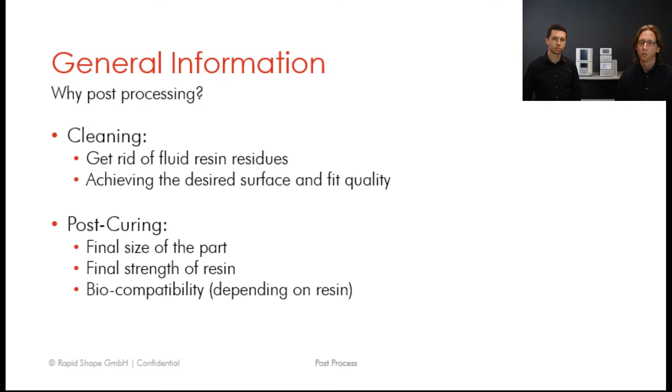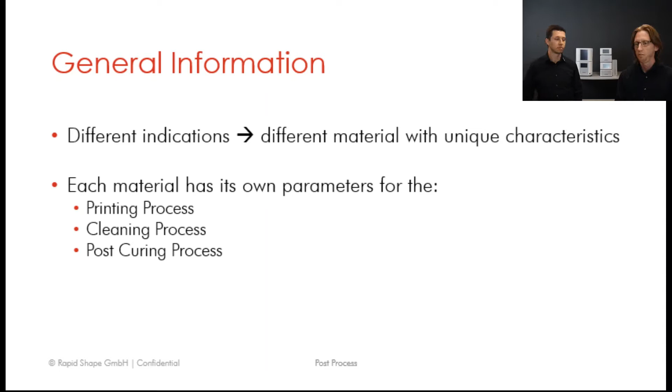All of these parameters are tested and validated by the Rapid Shape lab team together with the Straumann lab team, and the final work is then pushed into a new engine which you will receive in a Netfabb update. I can see there's still no questions, so I think we can move on with the handling.

So, you got two topics, or what shall I do? That's all right, you see, I totally forgot the order of our webinar, sorry for that. No problem, so let me take over the handling of the parts as well, as planned.

A couple of things we have to take care of after finishing the print job. We always have to wear gloves. That is super, super important. Anytime you could get in touch with the resin, you are a little bit in danger, so make sure that you always wear gloves.

Some customers ask us, hey, but do I really need gloves? I'm printing only biocompatible material. So yes, you still need gloves for that, because the biocompatible state is only reached when you finish the full post-process.

So in a liquid state, it is still non-biocompatible, therefore we have to wear gloves all the time. We could get in touch with the resin. Then safety goggles are always important to work with, since on one hand we're working with UV light, and on the other hand with this resin, so if there's any drop getting in touch with your eyes, that could be dangerous.

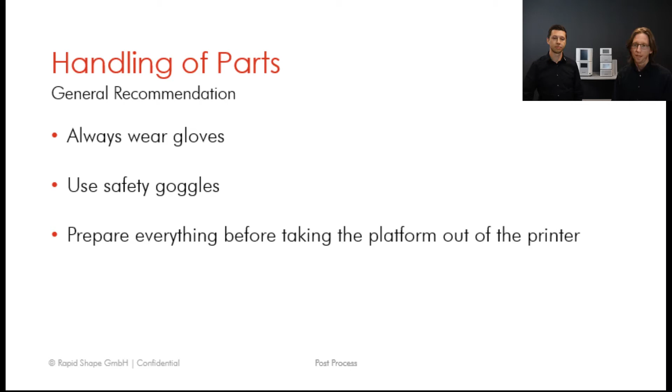Therefore we have the data sheets on every material bottle, but wearing gloves and wearing safety goggles is absolutely necessary here. Then we have to prepare our workspace before we take out the platform of the printer. That would be preparing enough space, putting the cleaning towels on the table, preparing your spatula in order to remove the parts of the platform, and all the other stuff you need.

So what are the steps we have to perform when it comes to removing the top of the build platform? First of all, we just remove the platform carefully out of the printer. We try to avoid any kind of dripping.

Then we want to separate the parts from the platform with a spatula and a hammer. For example, if you print a very rigid model material, it could be pretty difficult to just use a scalpel or spatula to remove that. So give the scalpel or spatula a gentle touch with a hammer, and this way the models will come up really nicely from the platform. It's just a little tool to help in this process.

Then, instead of the regular platform, you also have the surgical guide platform. Remember that there the parts will stay on the platform during the whole post-process, just to make sure the surgical guides don't have any kind of warpage effect, so that you get better results in accuracy and fitting.

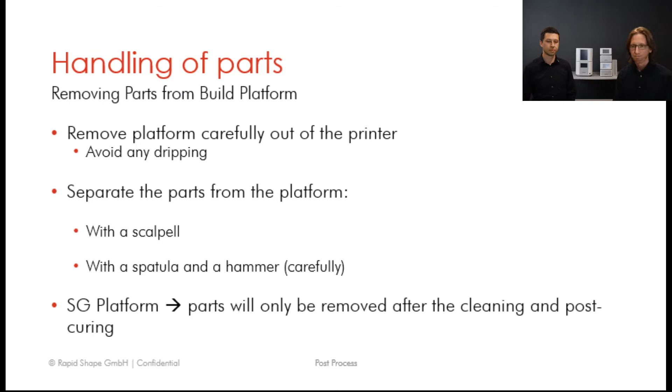Alright, so I think we can move on with the washing and curing units. Maybe as a short note, we also have a video on the Knowledge Center about the post-processing, so you can directly have a look at that video as well.

So in regards to the washing units, there are different methods in the field, which I already mentioned. There's the ultrasonic, there's the flow and swirl - that's just how I call it, I don't know the official term for it - and there's the centrifuge. Ultrasonic is the most used one, and flow and swirl, they both use some kind of cleaning liquid. Then there's the centrifuge, which is without any cleaning liquid, but it's also not used that much. So most common are ultrasonic or the flow and swirl.

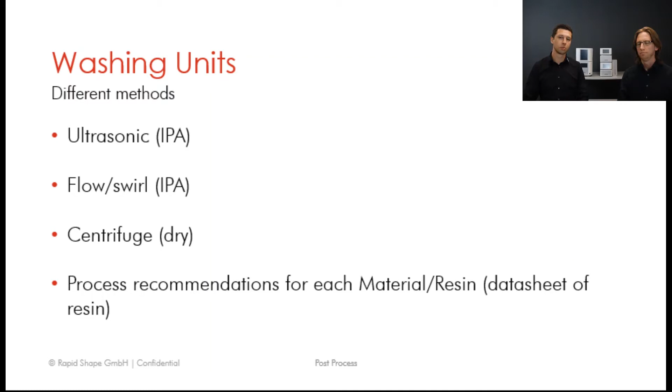As usual, for each process there are recommendations for each material itself. Some are allowed to be centrifuged, some are not, so you can get this information from the material developer or manufacturer.

So let's have a closer look at the ultrasonic. There's a wide variety because it's already used for a lot of things, and the big issue is you get direct contact with the IPA. So use gloves, of course. And the other thing is, with the open top and the ultrasonic, you will get IPA vapor in the air, which is also not that good, especially if there's resin dissolved in the vapor. Additionally, there's also the need to dry the parts after you cleaned them in your ultrasonic bath.

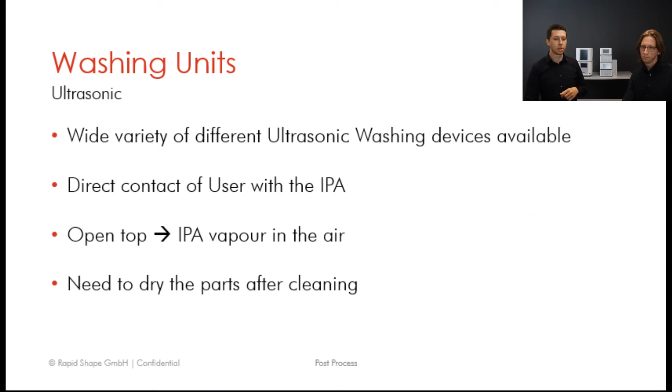If you now compare it to the flow and swirl, I will focus on the RS wash or P wash. The great benefit is, first of all, we got an automatic process. There's no 'I have to select this parameter, I have to switch it to this parameter because I'm using another material now' - it's everything automatic. And we have intelligent connectivity, which makes things even easier. You don't have to select material, you just select the same job you got on the printer, and you'll get it on the cure and the wash.

Additionally, like Robert mentioned, these are all validated parameters already on there, so nothing to worry about on your side. We validated with Straumann and the material manufacturers, put it on the machines, you just select it, execute it, nothing you have to worry about.

Additionally, we got the closed cleaning area, so no IPA vapor is directly going into the air. Additionally, we put it in there while the cleaning area is dry, so no isopropanol inside. Great benefit of using this method.

In order to also get rid of more IPA vapor, we got activated carbon filters inside because we're drying the part after the cleaning. Additionally, we will filter the air used for the drying with activated carbon filters, so even less IPA vapor in the air.

And as I mentioned, of course, no contact with IPA before and after the process. I put it in with gloves, it's in with the resin, close the lid, open it again after the process, and it's dry and clean. So no direct contact with IPA.

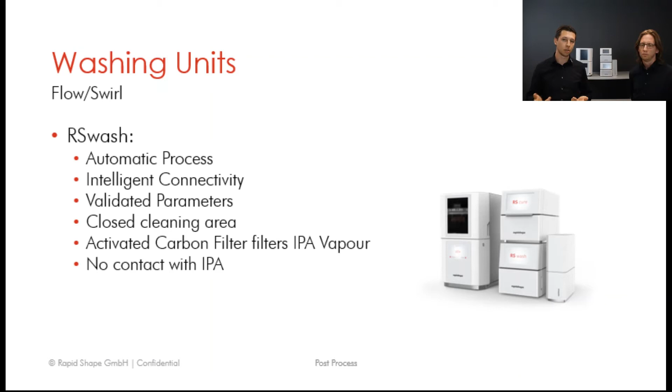Curing units, it's kind of the same. There are some different methods out there: UV bulbs, the flash box, most likely used at the moment, and the LED box, also very well known already in the field. So the only thing which is mainly different is the light source.

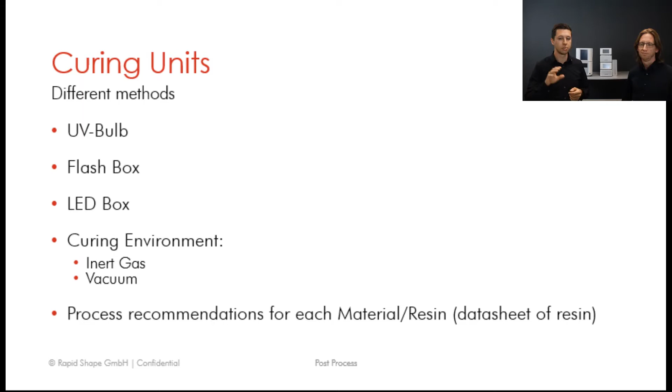And if you're using the curing environment as inert gas or vacuum. Again, also here, process recommendation for each material you can find in the data sheet.

I will just have a closer look here at the LED box, in this case the RS Cure or P-Cure, because this is also for us, or what we think is the easiest solution also for the customer. If you now use the RS Cure, you got the same benefits as the RS Wash.

You got the intelligent connectivity and the automatic process, so no process parameters you have to worry about. And you got a vacuum chamber, so no gas, no additional bottle needed in the office somewhere. So really quite handy solution, really small, totally fine.

I think that's enough information for the curing and washing units, and we will now have a look at the validation process, because we're just talking about all the validation parameters which we've checked and which material manufacturers check. So let's have a look into what's really going on.

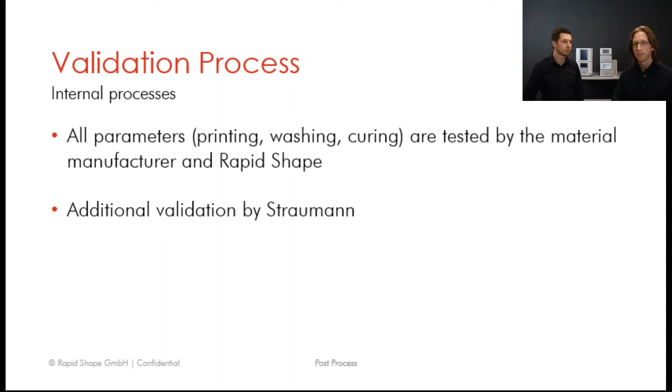How can we ensure that our resin, available in your Netfabb library, is printed in a way that it is precise, accurate, the fitting is nice, it's biocompatible, has a certain strength, and all these characteristics you want with your resin? This is tested by the RapidShape lab team together with the Straumann team. We are also cross-checking this with the material manufacturer, to make sure the customer has a plug-and-play solution. He's buying the resin from manufacturer A, adding this into the validated process, and then he's sure he's getting a perfect print result.

So how is this incorporated into our workflow? There are a couple of things we add to this. On one hand, we have the RFID tag on the bottle, so we can save the information stored on that bottle to the reservoir you use for this job.

We actually have two types of information on this RFID tag. The first is which material it is, so just which material class, saved on the reservoir, as well as the expiration date of this bottle. This is important in case you store these materials for some time, but basically if you use them within a year or 1.5 years, you don't get problems. Just in case, the machine is also checking the expiration date for you.

In addition to that, as mentioned in previous webinars, we have the material parameter selection in Netfabb. This is the most crucial element of the validated workflow. Based on this material parameter selection, we can make sure that not only the printing but also the washing and curing is done in a proper way to ensure accuracy and biocompatibility. We will talk about this in one of the next webinars where we cover wash and cure, but basically this is what it's all about: the RFID tag with the information stored on the reservoir, the parameter in Netfabb we have chosen, and the post-processing.

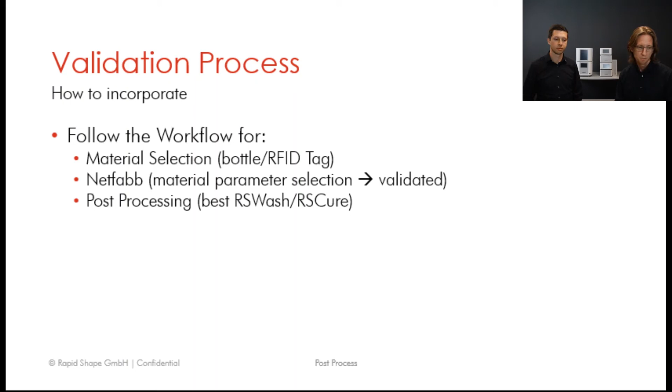Okay, I think we can proceed here with Q&A. This was really fast, pretty much the same short time webinar as this morning. You can be sure the next ones will be a little bit longer because we have other bigger topics coming up to discuss. But we still have some time left for questions, so please fire away, let us know all the questions you have in mind about this topic.

Okay cool, Antonio, yes we got this totally, so we have to have a look. We're now having different webinars in the pipeline we want to do, so let's see. We don't know exactly the timeline of when each webinar will take place. We're trying to send you the invitations as soon as possible, also with the topic of the webinar itself. A good thing Andre added here as a question: what happens if a customer is using a different curing process than the one you selected in Netfabb?

You can imagine using a different curing chamber or component to perform the post-process will change the way the part behaves during the curing phase. That means there's a different kind of shrinkage involved. The part may not be biocompatible because the different curing box might not use vacuum or inert gas, so you'll have to deal with some kind of inhibition layer in between. Only with the correct parameters do you get the best results in accuracy and biocompatibility. With that in mind, the lab team from RapidShape and Straumann have the wash and cure parameters in mind when they prepare the parameters in Netfabb.